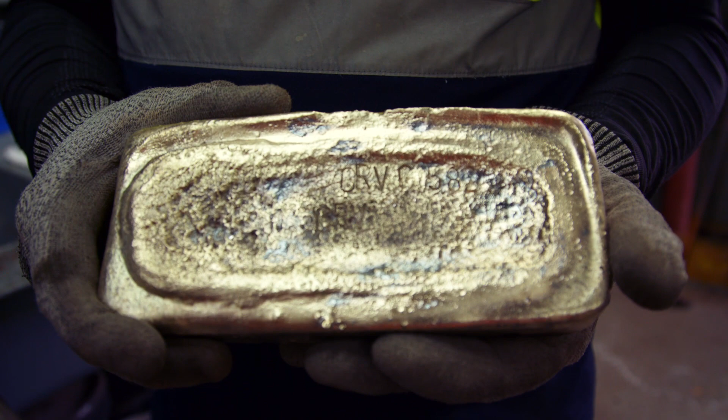We are OroValle, a mining company that extracts and processes ore in Asturias, northern Spain, producing gold, silver, and copper. We belong to Orvana Minerals Corporation, a Canadian company listed on the Toronto Stock Exchange under the symbol ORV.

Our activity takes place in the Boinas and Carles mines, which are 30 kilometers apart. Both were mined as open pits in the early 2000s, and now both are mined underground. Additionally, OroValle carries out continuous geological exploration work in the 3 gold belt areas of Asturias in search of mineral resources for new and continuous operations.

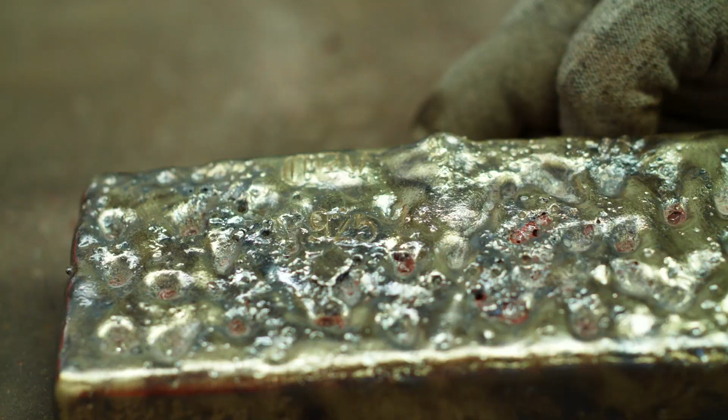OroValle manages a land package of 23,000 hectares in granted mining rights, plus 22,000 hectares in progress. We are committed to sustainable mining that balances safety with zero accidents, environmental care, the well-being of the community, and the economic results proper of a private concern.

Safety is the key priority for all the operational processes at OroValle. A strong safety training program is in continuous improvement.

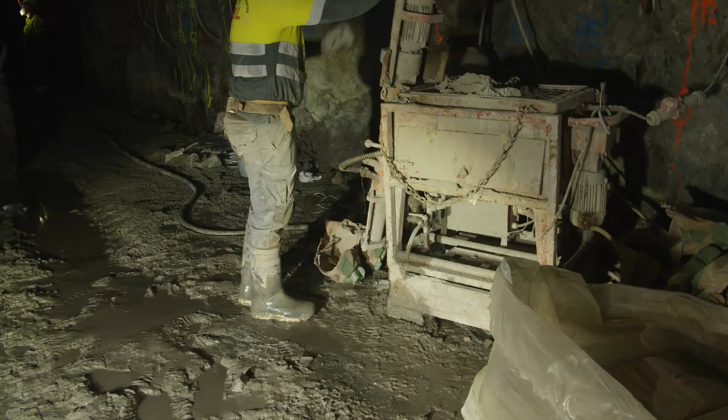OroValle is committed to the development of Asturias, generating employment, synergies with local partners, and the multiplier effect of indirect economic activities. Our company has a workforce close to 600 people, including direct employees and contractors, and generates more than 2,000 indirect jobs. Since its inception, the company has invested close to 160 million euros.

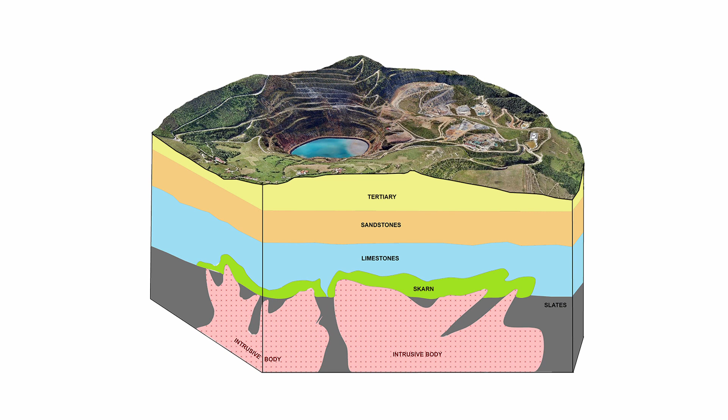In Boinas, we mine 2 types of mineral. The first one is skarn ore, formed by metamorphism when igneous bodies with an approximate age of 300 million years come into contact with limestone, forming metamorphic rocks with a concentrated mineralization of gold, silver, and copper.

The second is an oxide ore. After the skarn generation phase, other later epithermal type formations arose, related to faults to become oxidized and formed supergenic alterations, causing gold enrichment. There were also remobilization phases that further enriched the mineralization.

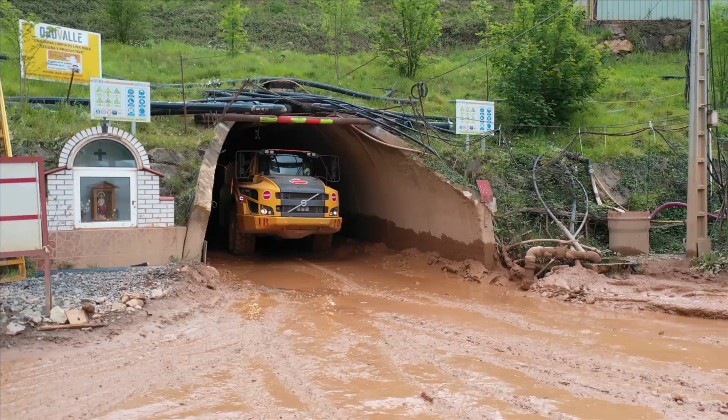Access to the Boinas mine entrance is at 400 meters above sea level, the deepest level being 0. The most important infrastructure is a vertical extraction shaft and hoist, 400 meters deep, which has a vertical fan and air systems with airflow at 170 cubic meters per second, and a main transport ramp with a 5 meter by 5 meter section.

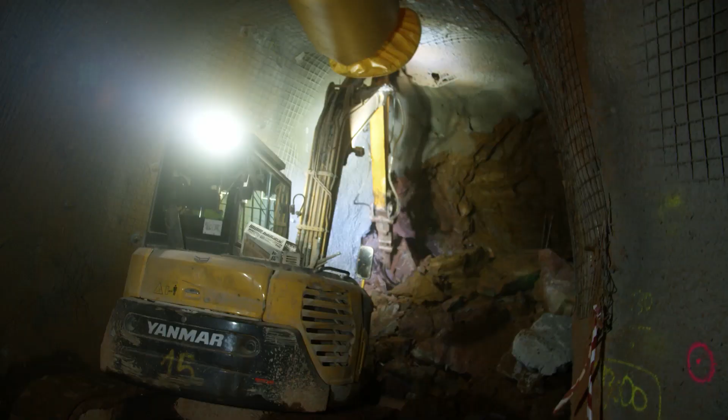Boinas has 2 zones differentiated by mining method: cut and fill and sublevel stoping. The average monthly progress in underground galleries is 500 meters with drilling and blasting in hard terrain, and 750 meters in weaker rock terrain, which requires retro excavation.

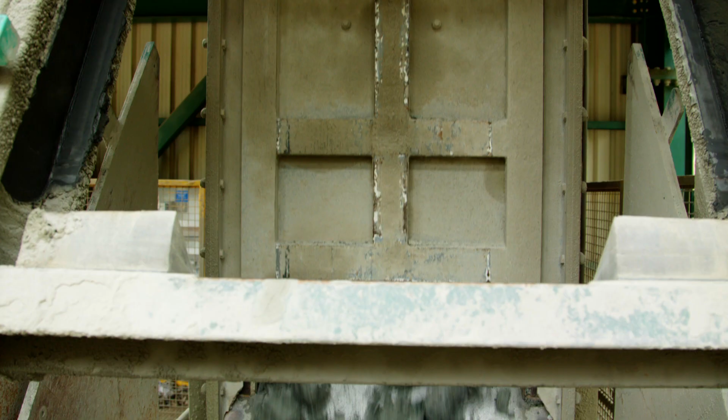The daily extraction by the hoist is 700 tons, which adds to the 1,400 tons per day hauled out by trucks. All maintenance services are located close to the mine portal.

Once equipped with their self-rescue gear, mining lamp, mask, goggles, and gloves, the shift crew proceeds to the daily meeting room. This room is divided into 3 functional groups: transportation, jumbo development, and mechanical advance.

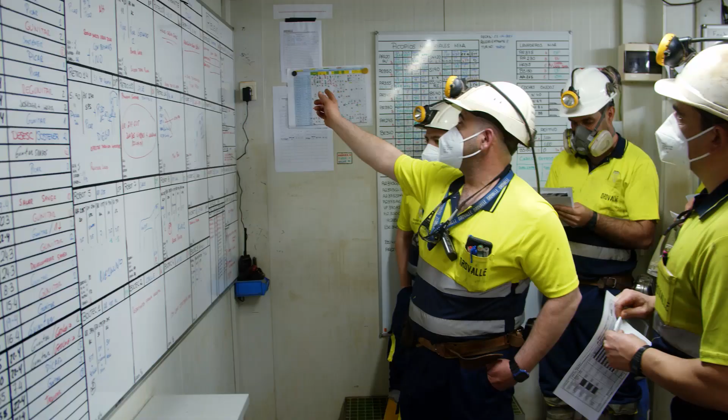It is here where we find the boards with safety information, work planning in the mine, maintenance information, and the work of the service teams.

In this room, the work team receives a safety talk with messages on safety regulations, lessons learned from incidents and accidents that have occurred. At the end of the safety talk, each shift supervisor gives the work fronts, tasks, and specific equipment information to his staff.

With all this received information, the shift crew is then distributed throughout the underground mine.

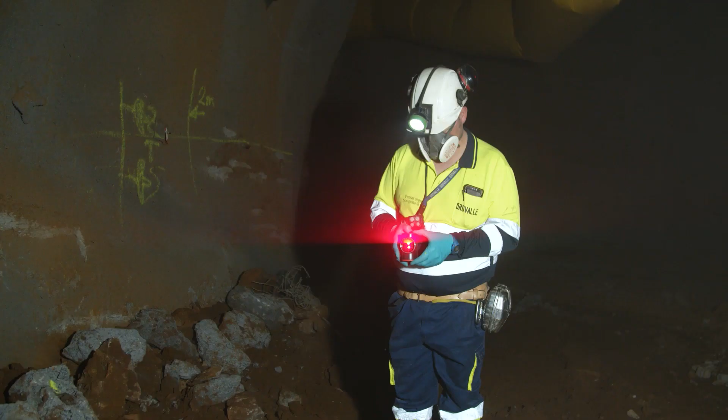Development in cut and fill is carried out with retro excavators equipped with hydraulic hammers. These machines advance 1.5 meters in length throughout the section. Previously, the face has been reviewed and marked by the shift bosses.

Marking consists of following the direction and gradient guidelines on the face set by the surveying personnel. Once the 1.5 meter advance has been cut, a low-profile scoop cleans up the material from the face. The material generated with each 1.5 meters is around 60 tons.

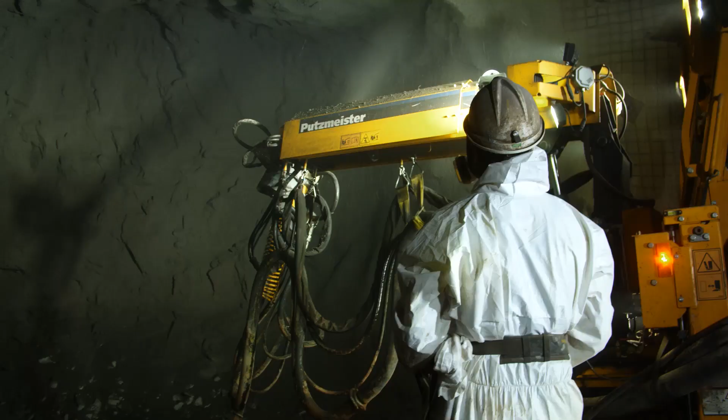The scoop loads the material into trucks. Once the face has been cleared of rubble and is free of material, a shotcrete robot is put to work at the face. Its function is to stabilize the ground with the projection of at least a 10 centimeter thick layer of shotcrete. The shotcrete is produced at a plant outside the mine.

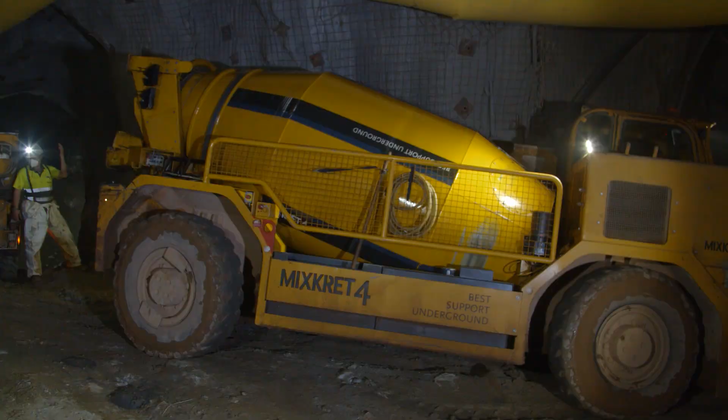The engineering department develops specific formulas of shotcrete to be used. Once the shotcrete is produced, it is transferred to the concrete mixer vehicle, which will transport it to the production areas of the mine. When the mixer reaches the face, it unloads the shotcrete into the robot hopper.

Prior to projecting the shotcrete, the face will be reviewed by qualified personnel, validating its good condition and giving permission to start the spraying. The operator uses markers to ensure the thickness of the shotcrete.

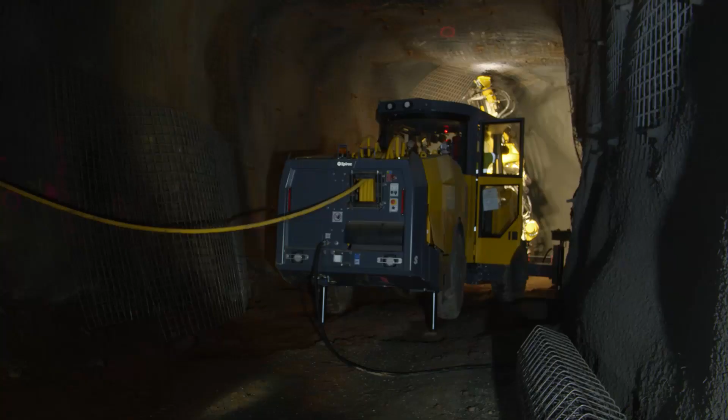Once the face has been sprayed, a 2-hour wait is necessary for the shotcrete to set. After setting, it is mechanically supported using a roof bolter, following a design established by the geotechnical department.

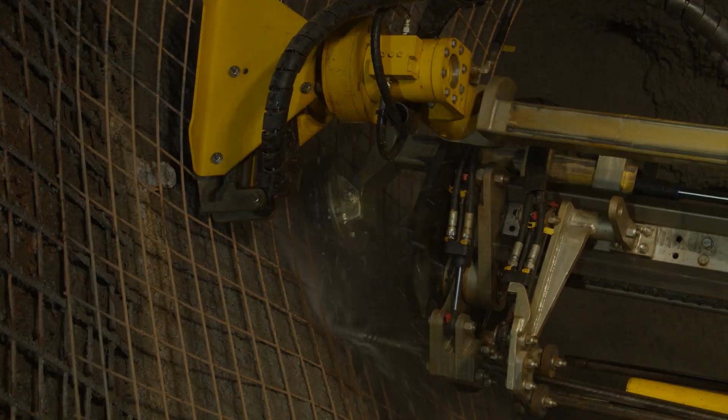Subsequently, they insert a 2.4 meter long Swellex into the drilled holes, 40 per advance, which will then be inflated to 300 bars of pressure. In this way, the terrain is further stabilized. On average, one rock face is reinforced every 2 advances, that is, every 3 meters.

The production process within the sublevel stope areas is divided into 2 processes, advance and stope.

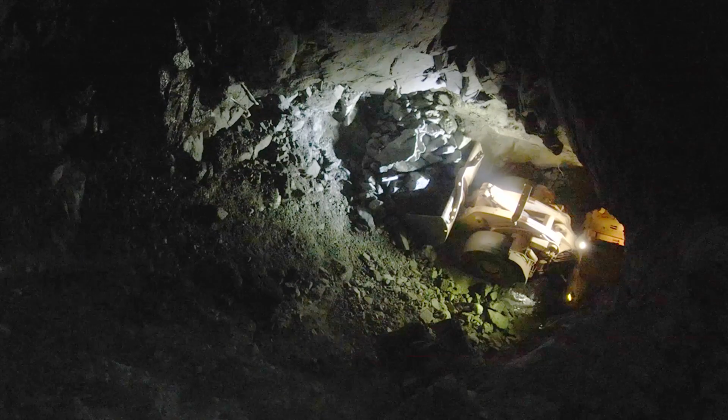Advance drilling is carried out with jumbo drill rigs. These jumbos drill 45 millimeter diameter holes, raised bore to 112 millimeters, and 4 meters in length. In OroValle, there are several drilling designs depending on the type of ground, ranging from 54 to 64 holes per face.

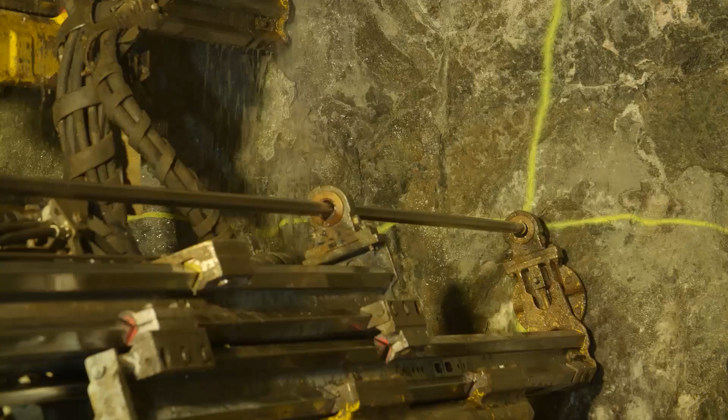Once the face is drilled, it is ready to be charged with explosives. This work is carried out by the gunners, who review the drilling design carried out at the face and extract the necessary amount of explosive from the magazine. Once in the mine, with the help of a telescopic handling device, they proceed to load the drilled holes with explosive. On average, 200 kilograms of explosive are used per blast, enabling an advance of around 3.7 meters per event.

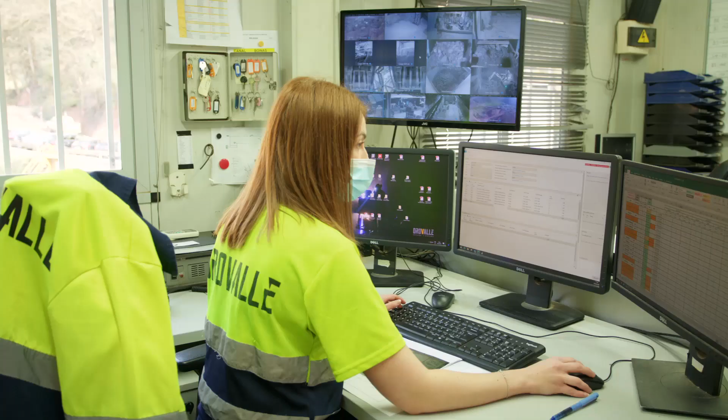At the end of the shift, with the approval of the shift supervisors, and with nobody remaining inside the mine, the loaded rock faces are fired.

After the blast, and once the gases generated are dissipated, the state of the face is checked. Then a scoop shovels up the blasted material, 120 tons on average, into trucks.

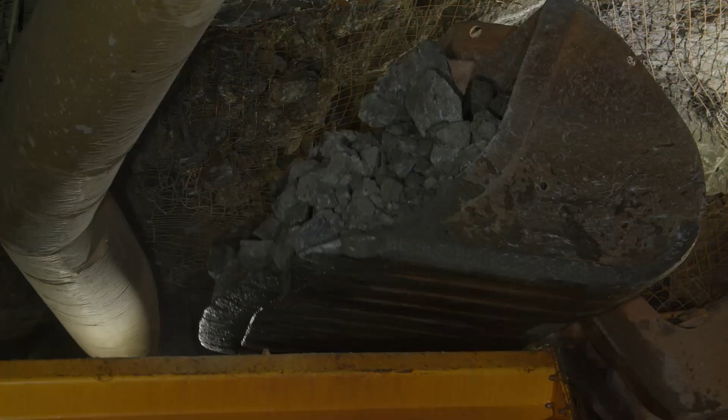Faces, already cleared of rubble, must be scaled, a task carried out by retro-excavators with hydraulic hammers. This mechanized scaling is carried out to eliminate the rocks that were not detached by the blasting, and it is mechanically reinforced with face drilling with a jumbo.

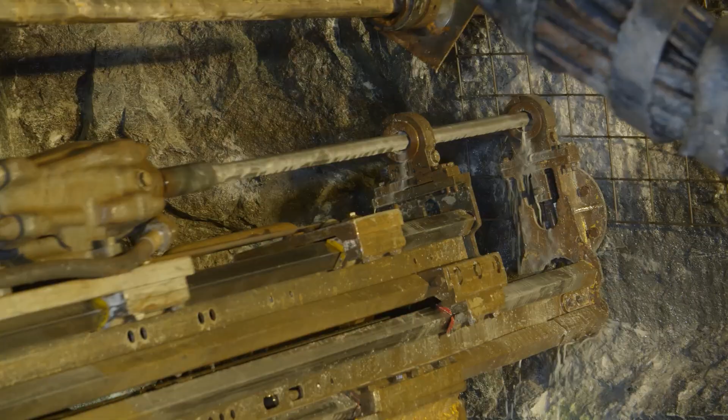The jumbo drills 43 millimeter diameter holes in the gables and roof, following a pattern established by the geotechnical department. Subsequently, a 2.4 meter long bolt, split set, is inserted in each hole. Jumbo development faces are secured with each advance with 30 split sets and mesh according to the defined standard.

Once the top sill and the bottom sill galleries have been made, the work to mine the stopes can begin. For each production stope, the engineering department designs the specific cable support.

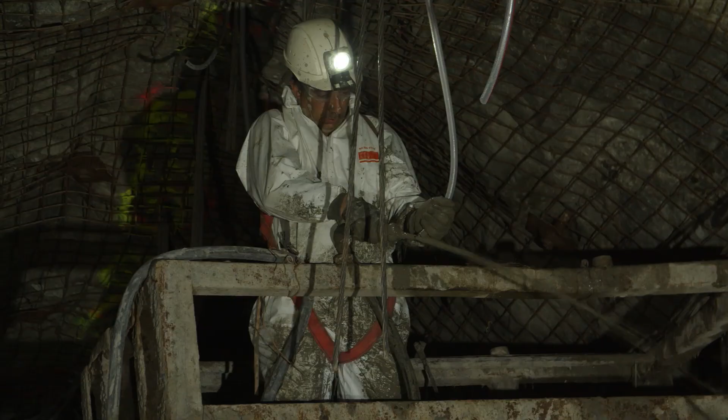Long hole production drill rig drills 70 millimeter diameter holes with lengths between 6 and 12 meters, depending on the design. Once the holes are drilled, the cables are placed and cemented, and after 24 hours for the cement to set, they are tightened. With the cable support completed, the production holes are drilled.

This drilling, just as the cable drilling, is carried out using the long hole production drill rig. The holes are drilled with a diameter of 89 millimeters, reamed to 152 millimeters, and with lengths ranging from 10 to 25 meters, depending on the design of each stope.

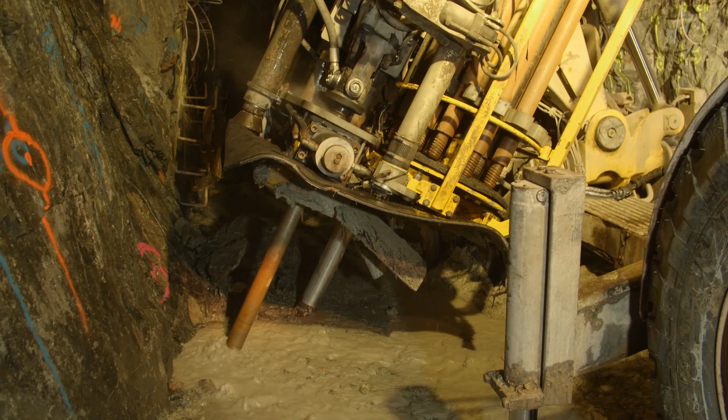Once part of the production drilling is done, the drilled holes in the stope are fired sequentially to begin extracting ore. The loading of the production blasts is carried out based on the defined plan, with the theoretical and actual data from the drilling. Electronic detonators are used for stope sequences.

After loading, the area is beaconed off. At the end of each of the 3 daily shifts, and with all personnel out of the mine, including gunners, the blast is fired.

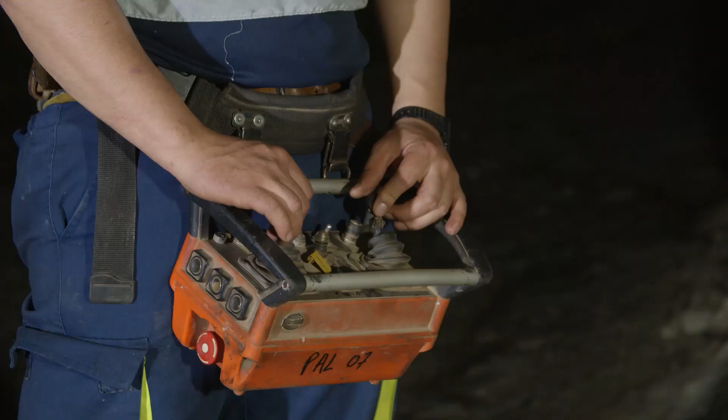Once the blast gases have dissipated, the stope is checked, and with the approval of the supervisor, the mineral is extracted. The scoop intended for this task has remote control for greater operator safety. This material is then loaded onto trucks.

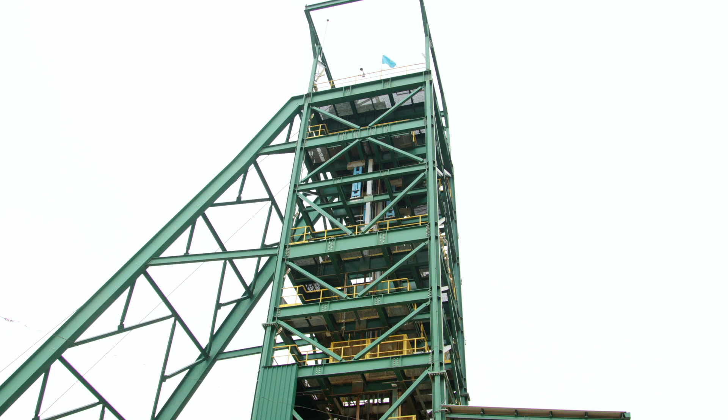There are 2 systems to transport material to the surface, by way of the shaft hoist or by truck. The extraction through the shaft is only for hard rock skarn, which in turn can be ore or waste rock. The trucks, loaded at the rock faces, transport the material to the shaft, unloading it into the bulk chute.

Next to the chute there is an arm with a hydraulic hammer that helps to reduce the volume of the material deposited by the trucks. This material falls into a crusher, then it is grinded down to a suitable size to be extracted through the shaft.

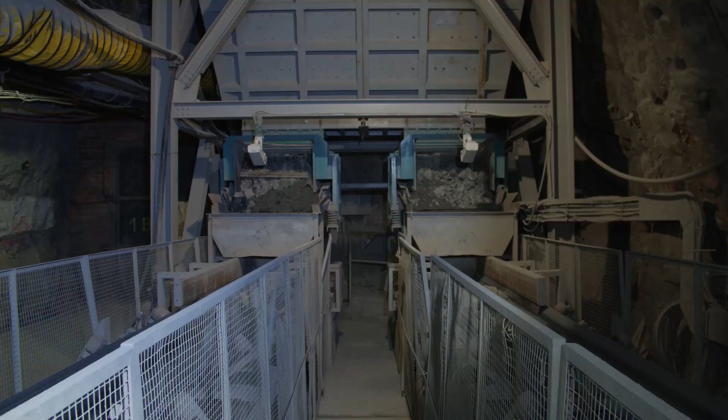A magnetic separator divides the iron, bolts, cables, from the material to be extracted. This belt empties the material onto the fines hopper, which later distributes the material onto 2 belts, which end up being unloaded into the 2 skips that take the material up and outside. Each skip carries a load of 6 tons. Finally, a belt takes the material to the plant stockpile.

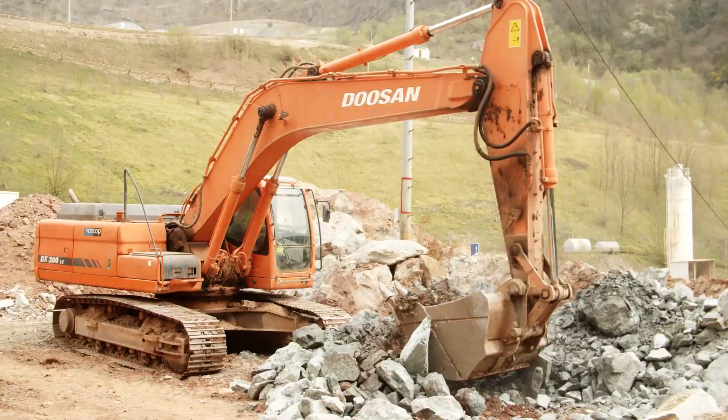The material that is not extracted by way of the shaft is transported by trucks and stockpiled outside. At the mine portal, the material is sampled and then transported to the plant stockpile. This mineral will be weighed and its origin identified.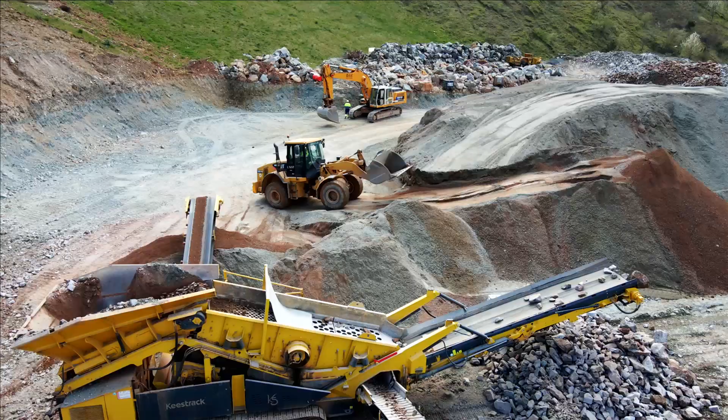The waste material is transported to the screening area for later use in the production of cemented rock backfill. 2 types of truck operate in Boinás: 24-ton articulated haulers and 15-ton mine trucks. Both trucks are used to transport cemented rock backfill to stopes and galleries.

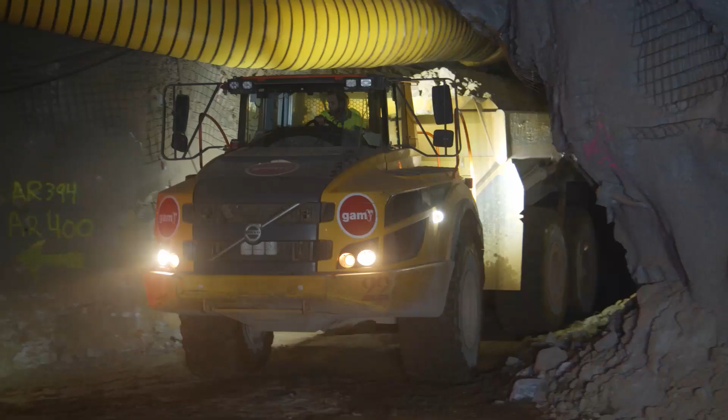Once a gallery or stope is mined, it is filled. Depending on whether it is of primary or secondary type, it will be backfilled with cemented rock or waste rock, respectively. The process is the same for both types of backfill material.

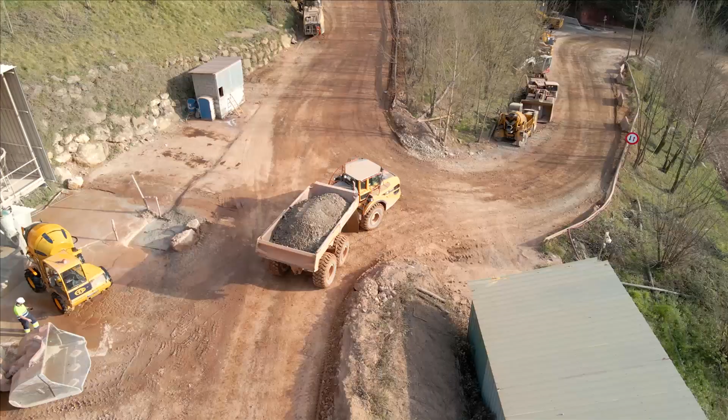The primary galleries are backfilled with cemented rock. This material, transported from the cement mixing zone, was previously screened to obtain the specific grading. Cemented rock is made up of 4% cement mix and previously screened rock. The mixing area is near the mine stockpile, from where the mixture is transported by trucks to the stockpiles inside the mine. The scoops take over from there and transport it to the stopes or galleries to be filled.

Cemented rock allows us to safely mine secondary stopes or galleries and thus extract all the mineralized rock. The geotechnical department keeps track of this process.

The waste rock backfilling process is similar to that with cemented rock. The difference is the origin of the material. The waste rock comes from the advances in faces.

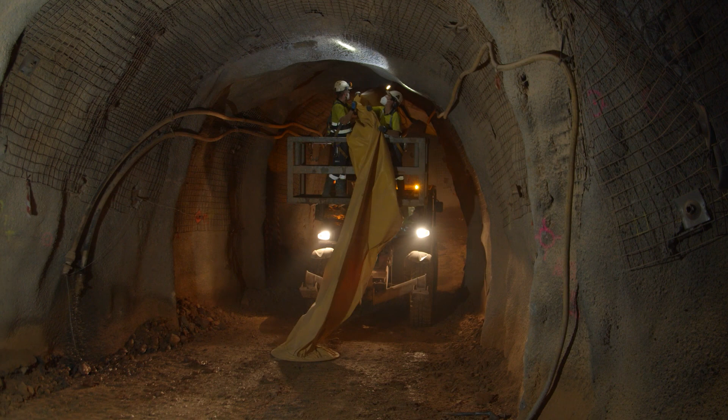The installation of services and infrastructure is a vital auxiliary task at the mine. These accompany the development of the mine, supplying water, energy, and ventilation, all essential for safe and efficient mining.

Water and ventilation are supplied through pipes that run throughout a large part of the galleries. Ventilation is brought to the work faces through 0.8 to 1.2 meter diameter mine ventilation ducting.

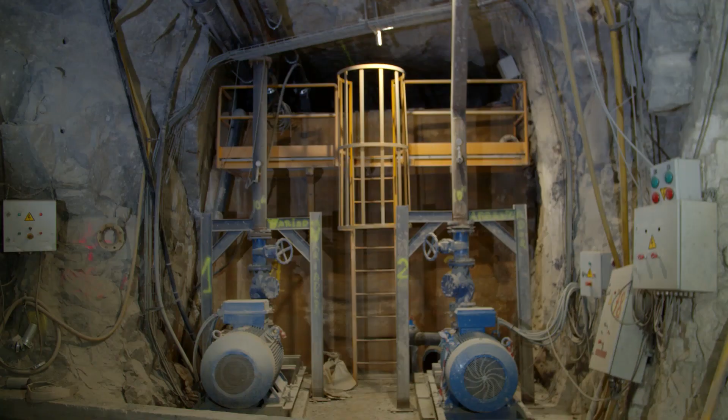Energy is supplied by transformation centers. In addition to these services, there is an extensive water pumping network at the mine, divided between operations water and clean water. All the water is redirected to the pumping area at 100 meter level, where there are 2 pools, operations water and clean water. The operations water is subsequently pumped outside for treatment.

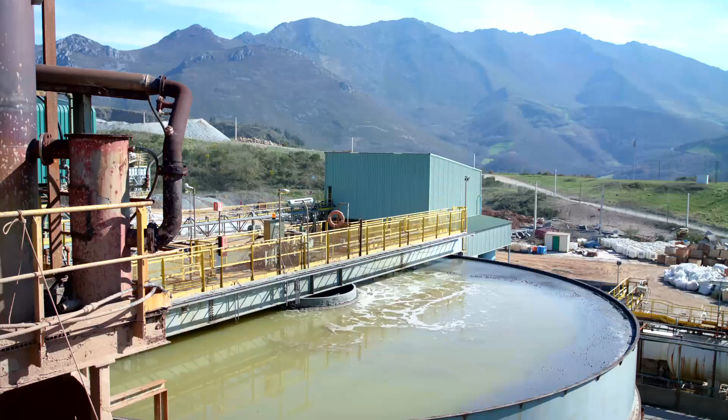The extracted ore is taken to the treatment plant. OroValle plant has a treatment capacity of 95 dry tons per hour. Ore grades, as well as recoveries, vary according to the blend of skarn and oxide ore treated.

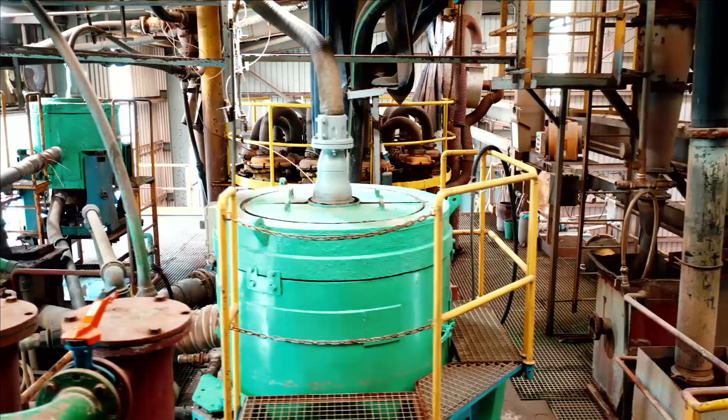The different treatment circuits in the plant permit producing the following marketable processing outputs: copper concentrate, gravimetric dore, and leaching dore. In OroValle, copper is present in two ways: native copper and sulfide copper (bornite, chalcopyrite). It is recovered by means of a gravimetry circuit for native copper, and a flotation circuit for sulfide copper and native copper that may remain after gravimetrics.

The mineral is classified in stockpiles according to its gold and copper grades. Penalty elements are also monitored at this stage. Once all factors are considered, the stockpiles are fed to the plant following optimal blends.

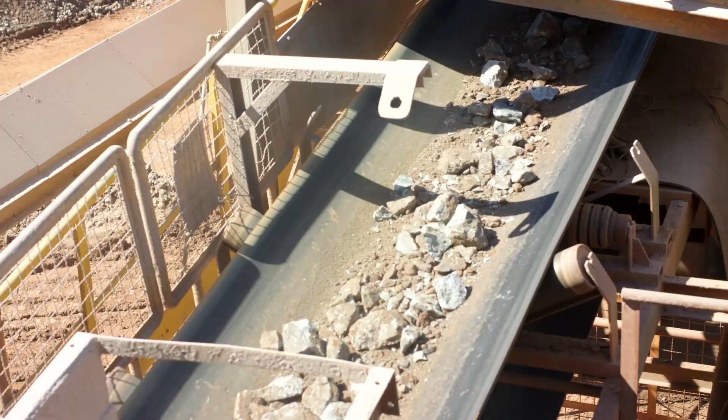The first process in the plant is dry grinding to 153 millimeters. After crushing, the mineral is subjected to fine grinding at around 74 microns to liberate native gold. This grinding is carried out with water in two stages, a ball mill and a sag mill. The ground ore passes through a battery of hydrocyclones with a diameter of 74 microns.

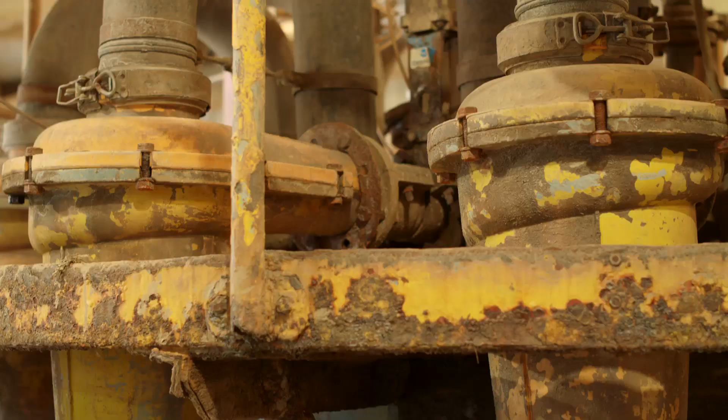Hydrocyclones separate the ground ore into two streams: spillover, or fines smaller than 74 microns, and sunk coarse sand with a size greater than 74 microns. Part of the sunk material is returned directly to the grinding circuit.

The remainder is passed through a 2 mm mesh screen. Ore caught in the mesh is returned to the grinding circuit. The rest enters the gravimetric circuit.

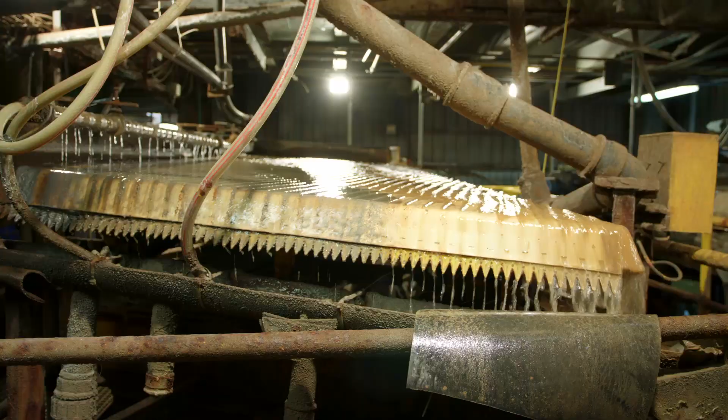This circuit allows the extraction of native metal concentrates, copper and coarse gold, based on their specific weights. In this circuit, a copper concentrate with a high gold grade is obtained. It undergoes a final transformation in the ILIX circuit afterwards.

The ILIX circuit consists of a reactor, an electrolyte tank, and two electrowinning cells. The high-grade gravimetric concentrates enter the reactor, to which a mixture of fresh water, caustic soda, and cyanide is added. The cyanide dissolves the gold present in these concentrates.

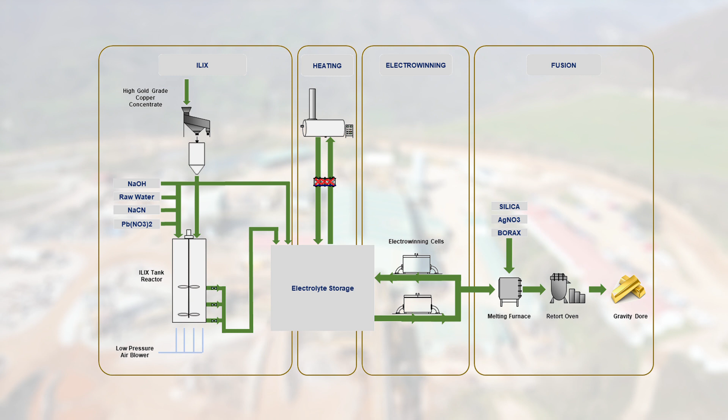The solution, when charged, is separated from the solid residue by decantation. The solid material returns to the ball mill, and the liquid is sent to electrolysis, where the gold is turned into solid state in the form of a slurry. This slurry is finally smelted to obtain the gravimetric bullion.

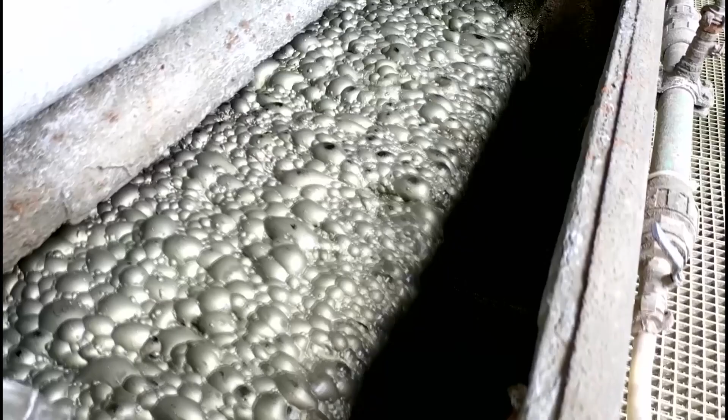The overflow from the cyclones goes to the flotation circuit. Here, two types of reagents are added: foaming agents and collectors, to trap copper sulfides on the surface of the air bubbles present in the mixture, which spill over through the cells in the form of concentrated foam.

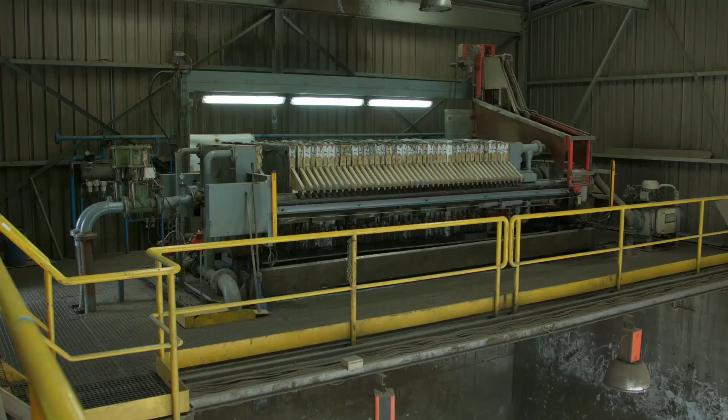The foam is subjected to a thickening and subsequent draining process with a filter press to lower the humidity to 10 to 12%. This is how we obtain the copper concentrate.

The residual pulp from the flotation circuit, after passing through a thickener, is subjected to the CIL process of gold leaching and subsequent adsorption onto activated carbon. The fine gold particles that do not come out through the gravimetric process or by the physical-chemical flotation process are extracted here by chemical reaction with oxygen and cyanide in the CIL circuit.

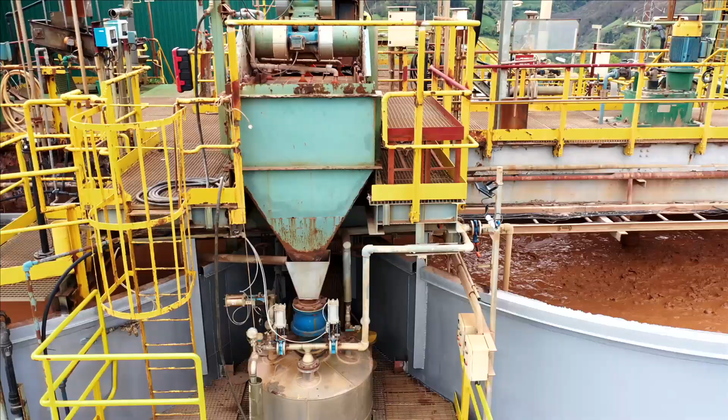The carbon charged with gold goes to the elution process, from which free carbon and a gold cyanide complex called electrolyte are obtained. The freed carbon goes back to the CIL circuit.

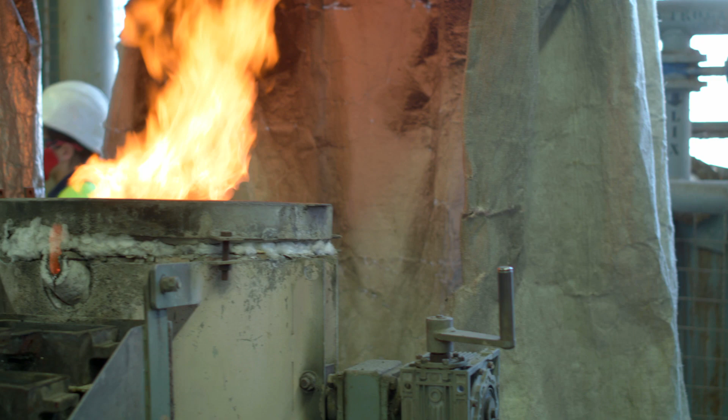The electrolyte passes through electrolysis cells and generates a cathodic sludge, which is dried and mixed with the appropriate amounts of fluxes. This mixture goes to the melting furnace to obtain the CIL bullion.

The final decontaminated waste is deposited in the tailings storage facility.

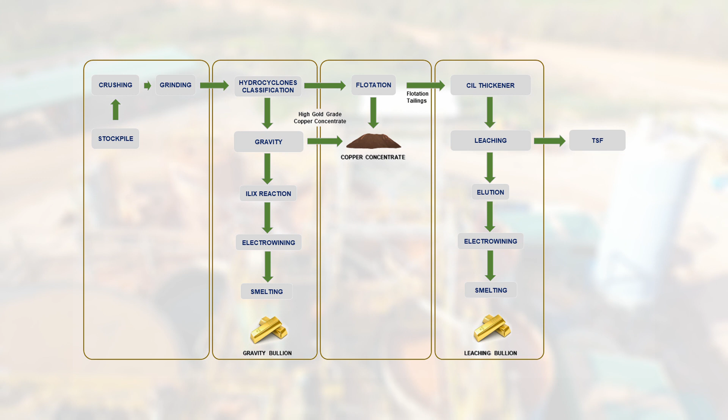After viewing the process from a broad perspective, the question arises: why such a distribution of metallurgical processes in our OroValle plant? The answer is that Boinas has three types of gold and copper: native, oxidized, and sulfidic, and trying to recover those two metals from a blend of native, oxidized, and sulfidic minerals is a challenging endeavor.

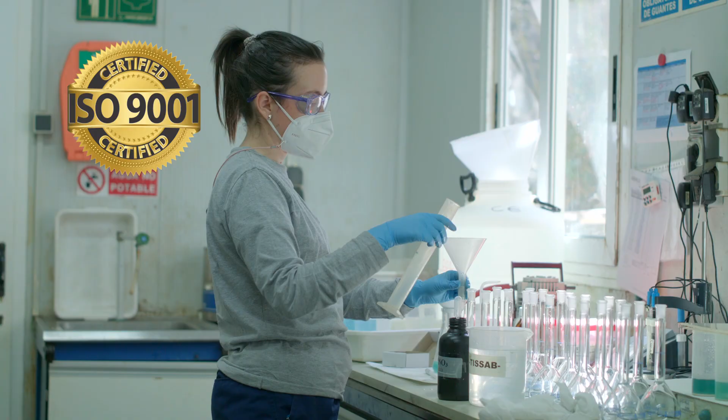The OroValle laboratory is ISO 9001 certified. It is located near the plant facilities and analyzes the following types of samples.

Samples from OroValle plant are taken from different circuits of the plant and transported to the laboratory twice a day. Grade control samples are samples from the mine rock faces of the extracted ore.

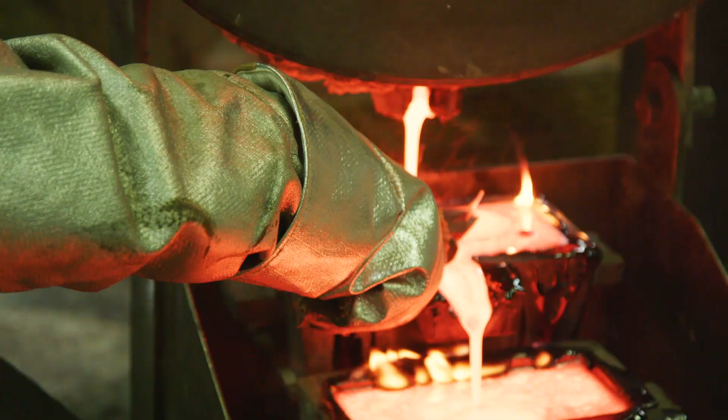Exploration samples, obtained from exploration core logs, environmental samples for the control of water in the mine and surrounding area, samples of the final products for sale, bullions or doré bars, and copper concentrate.

In this case, certificates of analysis are issued that must accompany our products from the moment they leave OroValle plant to their final destination. The samples first go through a technical preparation according to each type, where following different procedures...

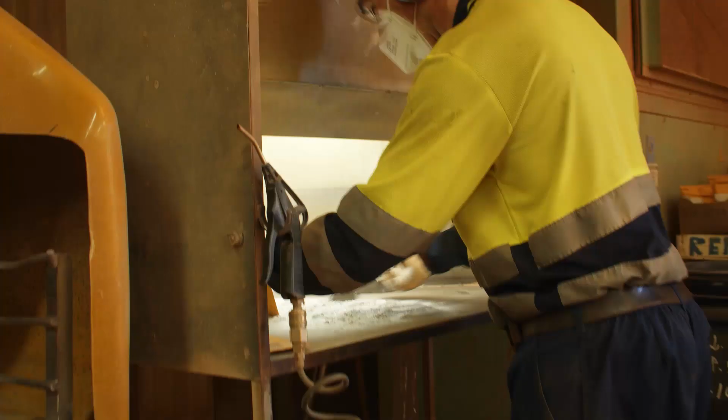They are dried and ground to a particle size of less than 0.075 millimeters and are reduced to a weight of 150 grams without losing their capacity to be a good proxy for the whole sampling material set aside.

Then they go to the laboratory where, following two procedures known as fire assay and acid digestion, they disintegrate and remain in solution.

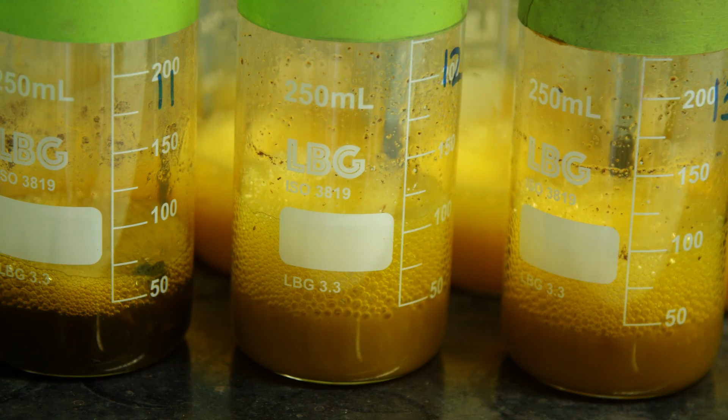Finally, in the dissolved liquid samples, the content of metals of value such as gold, silver, and copper can be measured. These measurements are made using optical spectroscopic analysis equipment, atomic absorption, and ICP.

As a general rule, in each sample we analyze between 7 and 12 different chemical elements.

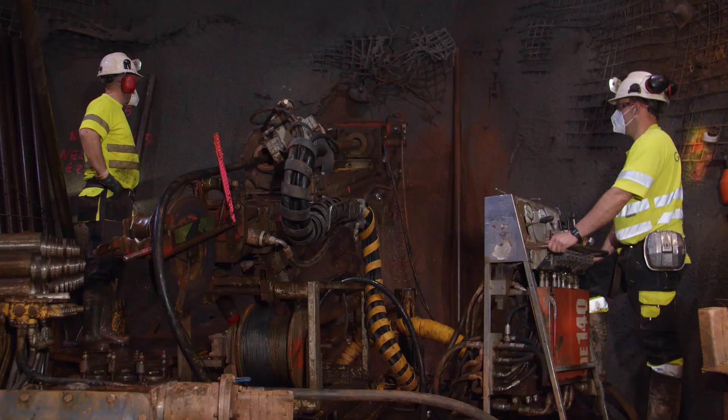To define the mineral resources of the OroValle deposits, lithological information is needed. This is obtained by drilling boreholes to take core samples. Once drilled, the core sample is stored in boxes for testing at a later date.

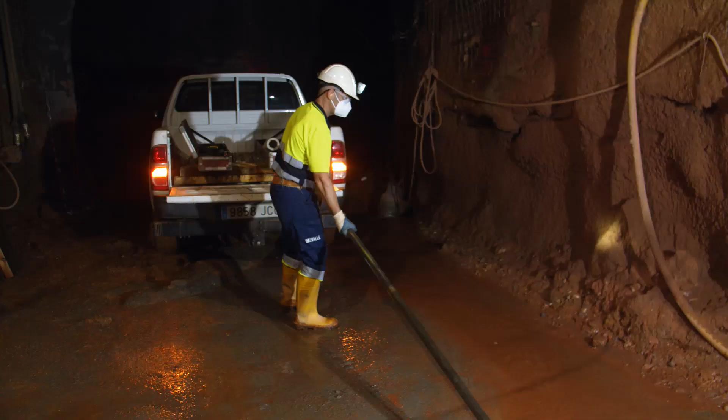The drill holes can deviate from the initially planned trajectory. Given the importance of knowing exactly where the mineralization is, measurements of these deviations are made using the maxibor. Maxibor is an optical instrument that is not affected by the presence of magnetic minerals that may be present in the deposit. The information obtained is entered into a database.

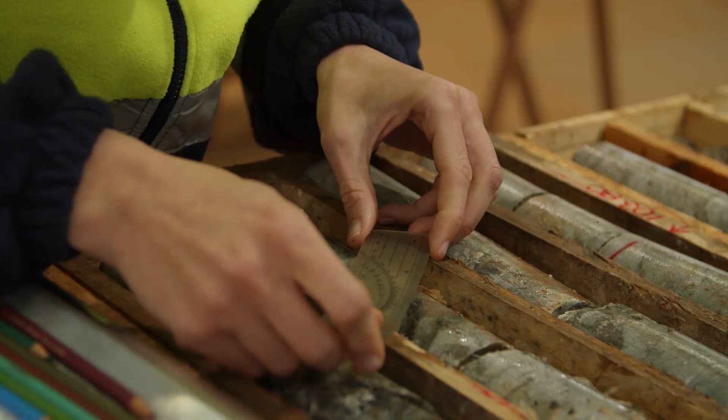The core samples obtained are taken to the testing area, where a lithological and geotechnical description is made. The different lithologies are described by means of detailed logging. Information is collected on lithological contacts, orientations, and bands, which will later be used in the geological interpretation of them.

The geotechnical description is used to define the RMR and RQD parameters that determine the type of support to be used during mining.

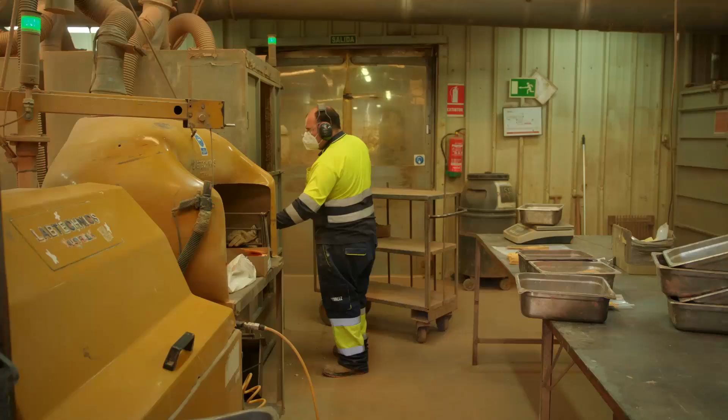Afterwards, the mineralized parts of the core samples are prepared for subsequent analysis in the OroValle laboratory. The sample preparation and analysis process is carried out according to international standards.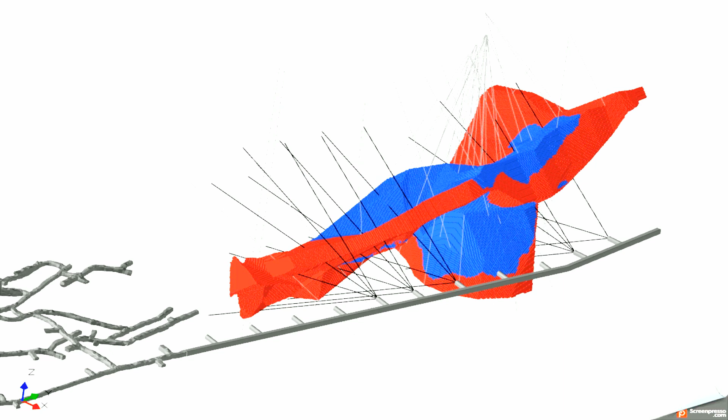Core sample drilling or boreholes have several purposes: infill drilling, to transform inferred resources into measured or indicated resources; grade control, to define with greater certainty the grades of stopes or panels in the mining process; and exploration drilling, to find new resources in undefined areas which allow the life of the deposit to be extended.

Lithological and geotechnical descriptions are made about the rock faces as the mine galleries and stopes are advancing. There is also systematic sampling in the advances. All this information is integrated into the database using RecMin software.

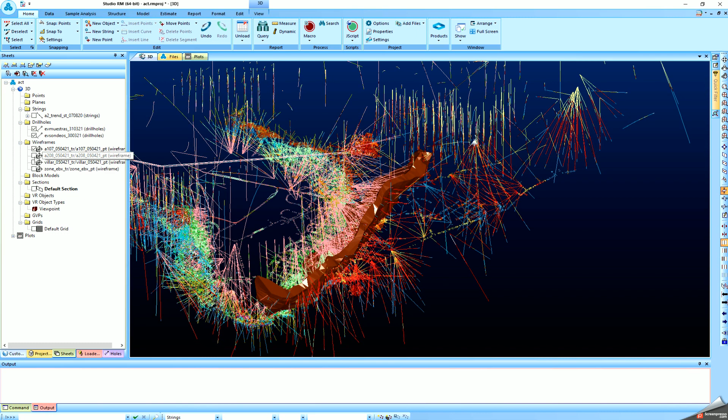Once the drilling information has been integrated with the samples from the advanced faces, the different mineralized bodies are modeled in 3 dimensions using DataMine software. Geostatistical calculations are applied to the mineralized bodies already modeled, taking into account parameters such as distribution of the grade in the body, the number of samples, length of the samples, and spacing between drill holes.

This application results in a model that predicts the distribution of the mineral within the body. The information in this model is what the engineering department uses to design mining operations.

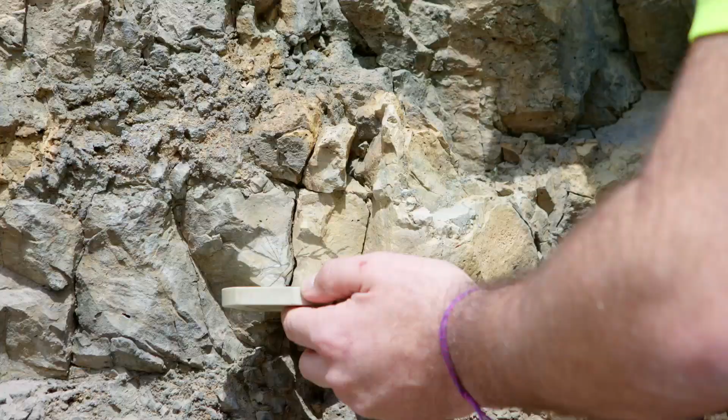Regarding greenfield exploration, OroValle has investigation permits in 3 gold belts in Asturias. The first phase of the fieldwork consists of general geological mapping and the collection of outcrop samples for analysis.

Soil geochemistry and geophysical studies can also be carried out. All these studies make it possible to define areas with potential interest, to which more detailed cartography will be carried out, and more samples and prospecting will also be done.

The final step is drilling, which will define the mineral potential of the area under exploration.

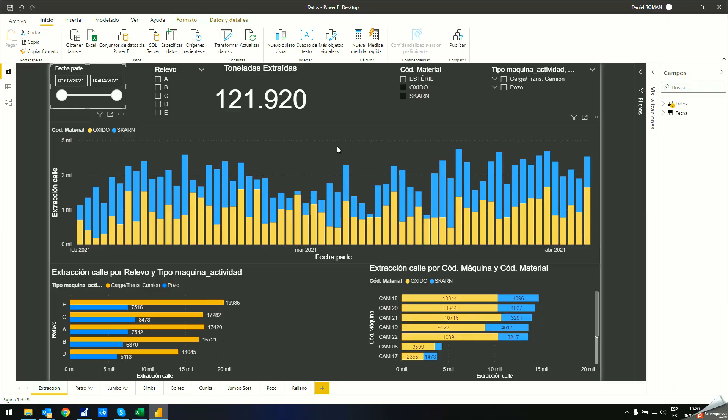The engineering department defines the mining strategy once the geology data has been received. To do this, it takes into account the price of metals in addition to other factors. It is divided into different areas.

Long-term is where geology information is received as block models. Mining designs are applied to these block models that end up quantifying the reserves of the mineralized area in question. For this, it takes into account both the infrastructure of the mine and the key performance indicators of the operation.

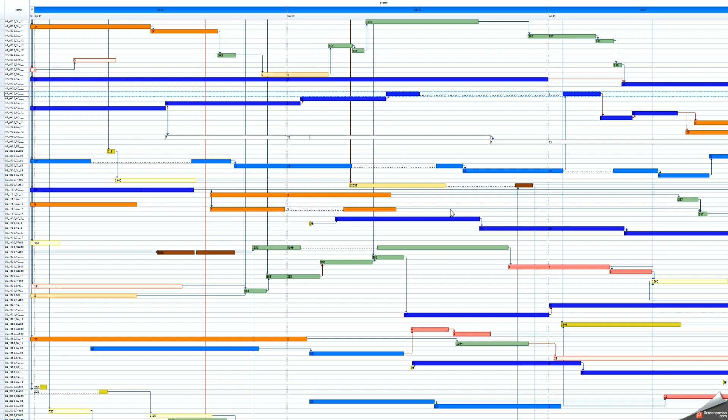OroValle uses Deswik and DataMine as software. Short-term performs quarterly, monthly, and weekly planning using the Deswik software sequencer. This planning is coordinated with geology, mine operations, and mine maintenance.

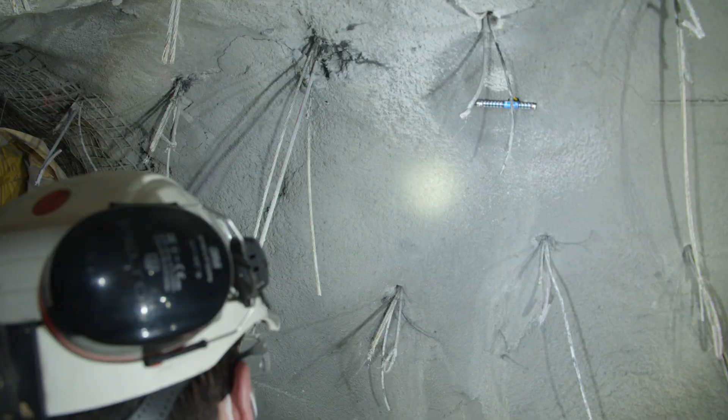Drilling and blasting carries out the design of the blasting in stopes, for which it uses geological and geotechnical information. They use DataMine's Aegis software. They carry out and supervise drilling for blasting designs and adapt the quantity and sequence of the explosives for each blast. After a stope has been emptied, a reconciliation takes place.

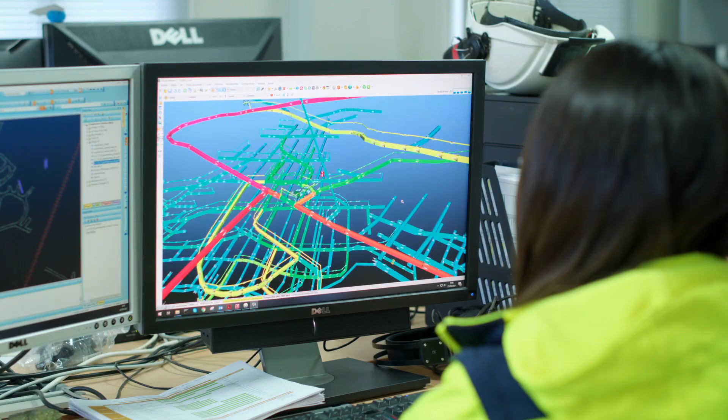Ventilation and Services uses the VentSim mine ventilation software, which simulates the state of ventilation, ensuring established standards for work fronts. They plan and supervise the distribution of mine services, such as air, water, and electricity.

Topography is in charge of carrying out the topographic control of the entire operation, both underground and outside the mine. They use Total Station, CMS, GPS, and a drone.

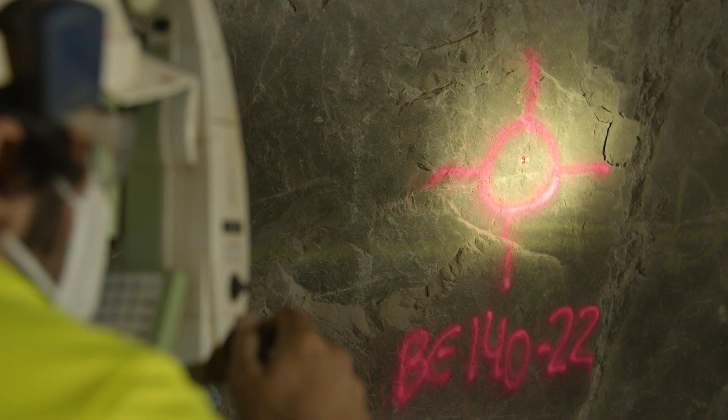Measurements in the mine are carried out with Total Station, which marks and controls all the galleries defined by engineering, and carries out a study of over-excavation and sub-excavation.

The measurement of stopes is carried out with a CMS, which, once the wireframe of the measurement has been processed and generated, is passed to drilling and blasting for further treatment.

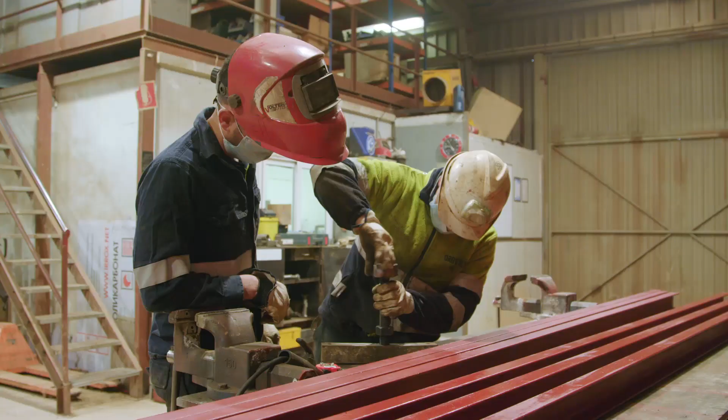The maintenance team is made up of our own engineers, mechanics, and electricians, as well as specialized technicians from Epiroc, Sandvik, Volvo, or Putzmeister. The maintenance planning department, together with the different section heads, designs the maintenance schedule, programs interventions on each machine, and develops and defines KPIs.

It is also here where the implemented actions are monitored along with the KPIs, and improvement proposals are made.

Close to the mine, we find the maintenance workshops for mobile equipment, infrastructures, pumps, and light vehicles. All maintenance tasks are carried out here to support day-to-day operations.

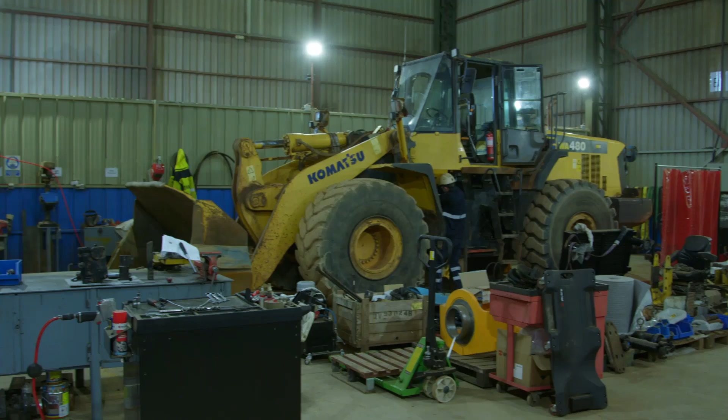OroValle has other workshops further away from the mine, where planned corrective maintenance operations and overhauls are carried out. In the vicinity of the mine, we find the electrical workshop, where, in addition to carrying out routine repairs for the mobile fleet, are all the other electrical and communications infrastructure repairs.

OroValle, in compliance with its duties as environmental steward of its surroundings, and as per our plan, monitors the quality of emissions into the atmosphere and inland water, the latter in the public hydraulic domain.

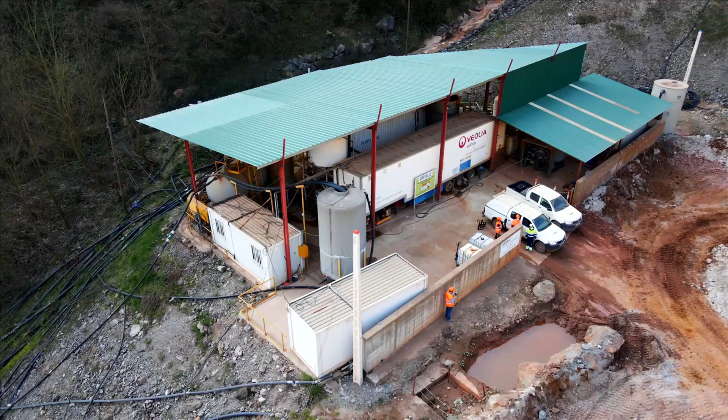The state of the air masses is monitored by means of measurements in the main emission sources of the plant. Water is monitored by means of programmed samplings. The reverse osmosis plant is located in the vicinity of the mine portal, where mine operations water is treated.

OroValle has a complete ecological restoration plan with ongoing revegetation and repopulation of native tree species. The tailings storage facility is located in a former open-pit mine, granting the benefit of not needing a dike to contain the tailings.

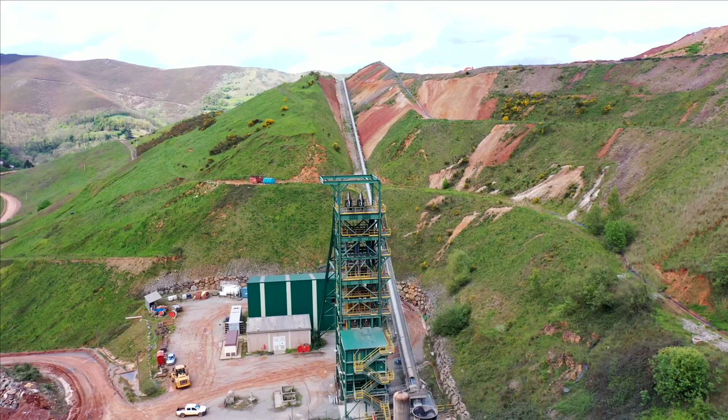OroValle is one step ahead in safety, exploration, infrastructure, and personal training to assure a future way beyond its known reserves.